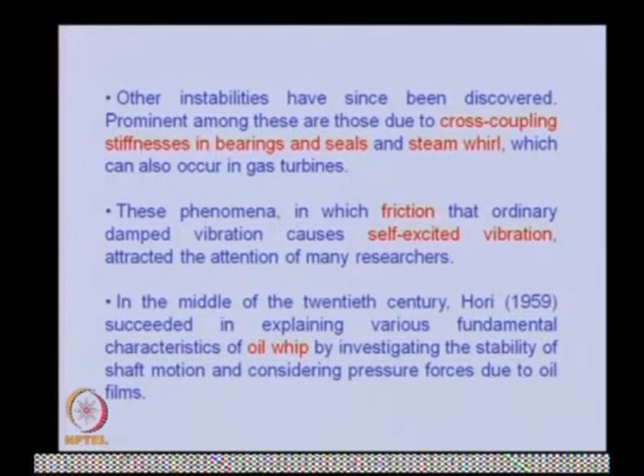In the middle of the 20th century, Hori in 1959 succeeded in explaining various fundamental characteristics of oil whip by investigating the stability of shaft motion and considering pressure forces due to oil films.

The mechanism of vibrations due to steam whirl in turbines was explained by Thomas in 1958, and that in compressors was explained by Alford in 1965.

The vibration of hollow rotors containing fluid is a relatively new phenomenon of flow induced vibration. Instability due to liquids partially filling the interior cavity of rotors was demonstrated by Kollmann in 1962, and in 1967 Ehrich reported that fluid trapped in an engine shaft induced asynchronous vibration and also changed the shape of resonance curves.

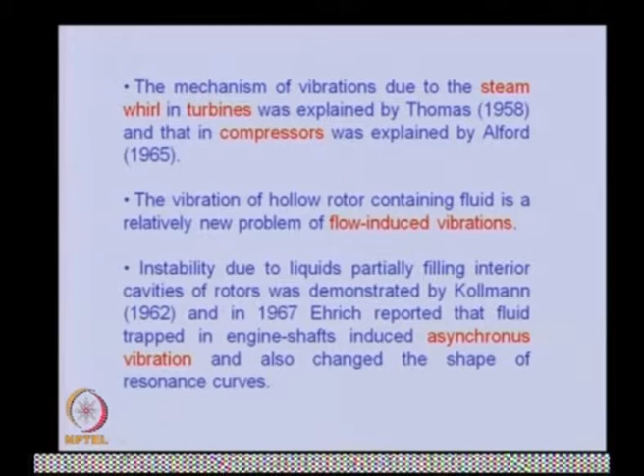Kuipers in 1964 and Wolf in 1968 independently succeeded in explaining the appearance of an unstable speed range in the post-critical region of a rotor system containing inviscid fluid.

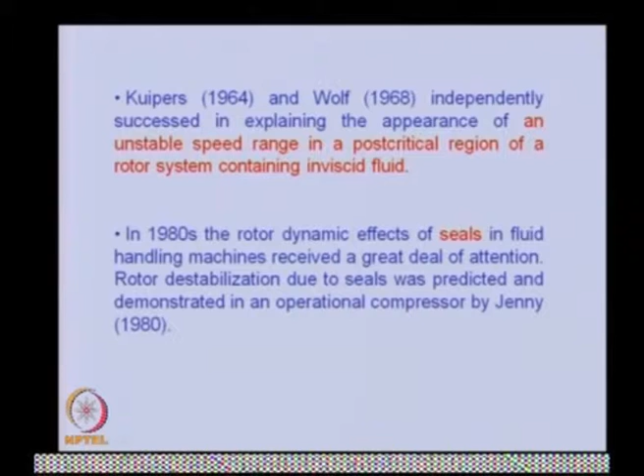In the 1980s, the rotor dynamics effects of seals in fluid handling machines received a great deal of attention. Rotor destabilization due to seals was predicted and demonstrated in an operational compressor by Jenny in 1980.

As rotors became lighter and rotational speeds higher, the occurrence of nonlinear resonances such as subharmonics of half x, one-third x, etc., became a serious problem.

Yamamoto in 1955 and 1957 studied various kinds of nonlinear resonances after he reported on subharmonic resonance due to ball bearings in 1955. He also investigated combination resonances.

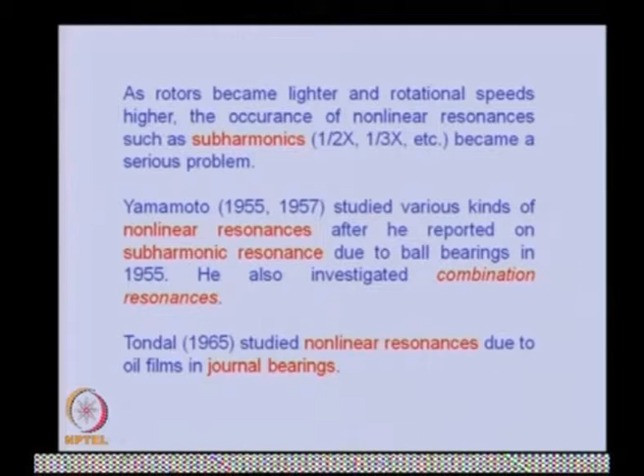Tondl in 1965 studied nonlinear resonances due to oil films in journal bearings. Ehrich in 1966 reported subharmonic resonances observed in an aircraft gas turbine due to strong nonlinearity produced by the radial clearance of squeeze film dampers.

These squeeze film dampers are identical to journal bearings. The only thing is that in the squeeze film damper, the stiffness property which a general bearing gives to the rotor is not there—only the damping it produces to the rotor.

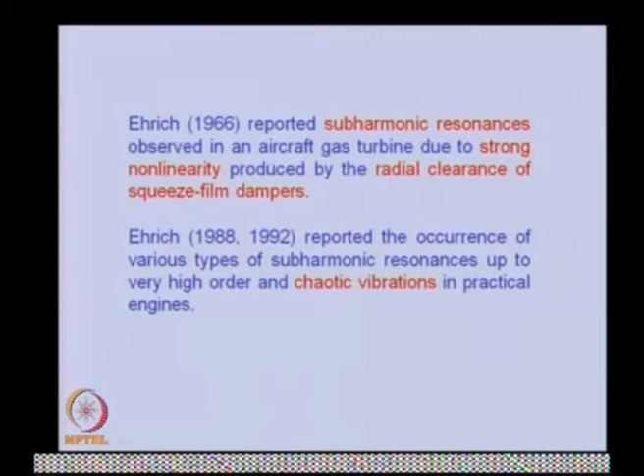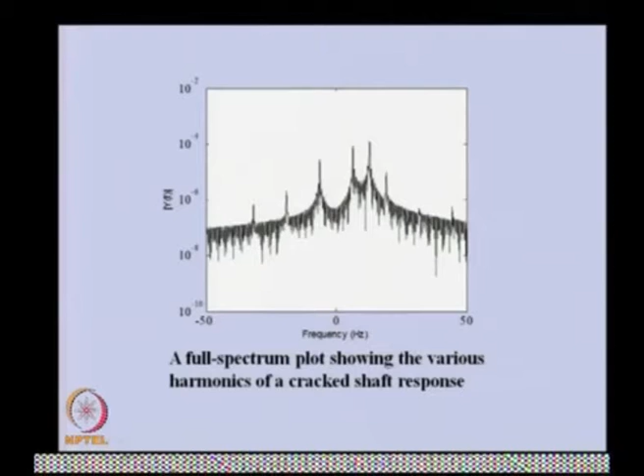The non-stationary phenomena during passage through critical speeds have been studied since Lewis in 1932 reported his investigation on the Jeffcott rotor.

Non-stationary phenomena that occur are of two types: one in a process with constant acceleration, and another with variable acceleration, in which we have limited driving torque. The theoretical analysis of such transitional problems is far more difficult than stationary oscillations. Many researchers have adopted numerical integration.

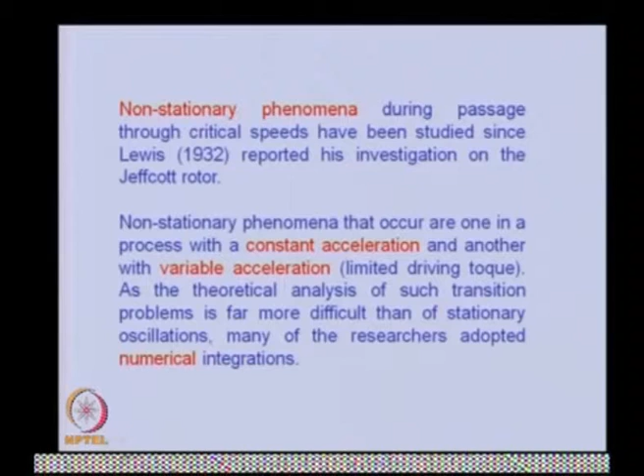In transient rotor analysis, you must have observed that to avoid the critical speeds, the rotors are generally given very high acceleration so that they can cross the critical speed very quickly and go into the supercritical region.

During acceleration, a problem may arise depending on the driving motor's power. If the drive has sufficient power, there will not be any problem achieving whatever acceleration we want. But if the drive has less power, the required acceleration will not be achieved, and you will have the problem of variable acceleration taking place.

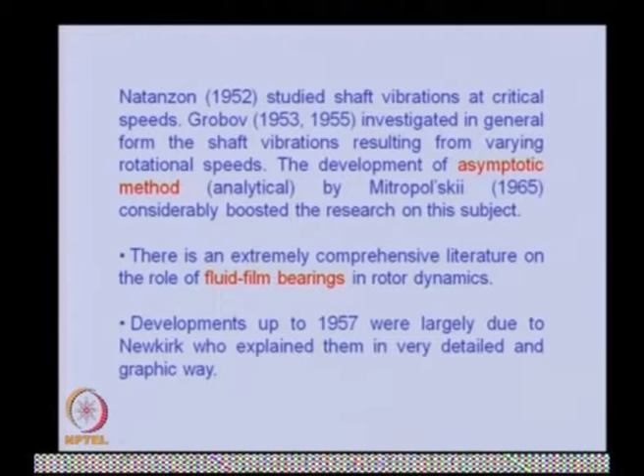There is extremely comprehensive literature on the role of fluid film bearings in rotor dynamics. Developments up to 1957 were largely due to Newkirk, who explained them in a very detailed and graphical way. Then beginning in the early 1960s, most attention focused on hydrodynamic bearings.

This was largely stimulated by Lund and Sternlicht, and Lund's work in 1962 and 64. Gunter's work in 1966 related to rotor dynamic stability problems, combined with Ruhl and Booker's 1972 and Lund's 1974 methods for calculating damped critical speed, stimulated a great deal of interest in rotor bearing stability problems. Lund in 1987 gave an overview of fluid film bearings.

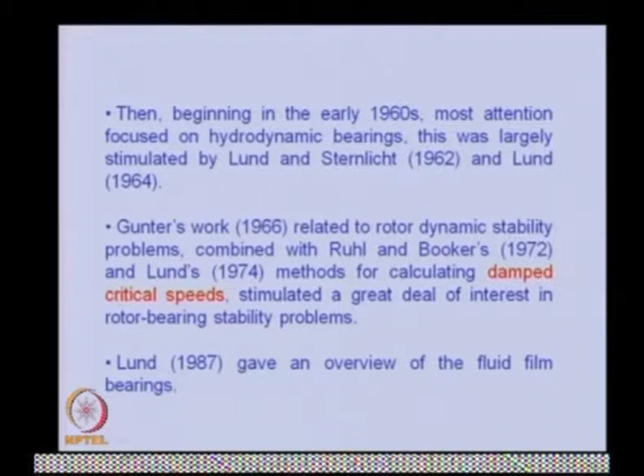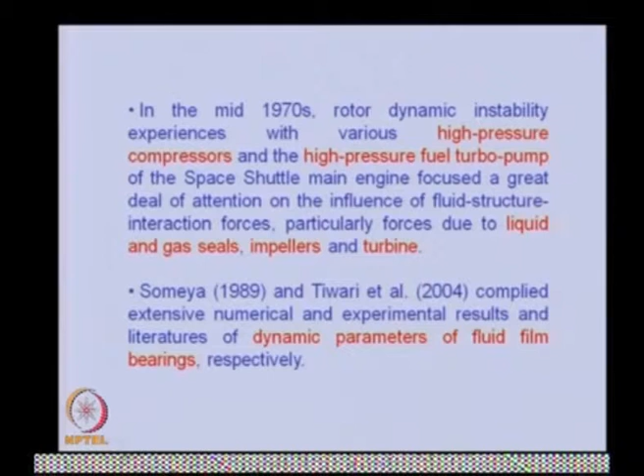In the mid-1970s, rotor dynamic instability experiences with various high pressure compressors and high pressure fuel turbopumps of the space shuttle main engine focused a great deal of attention on the influence of fluid structure interaction forces, particularly forces due to liquid and gas seals, impellers and turbines. Someya in 1989 and Tiwari in 2004 compiled extensive numerical and experimental results and literature on dynamic parameters of fluid film bearings respectively.

Shaft seals have similar effect as fluid film bearings. They influence the critical speeds, can provide damping, or on the other hand cause instability. Some of the first investigations were carried out in 1965 by Lomakin. Since then, shaft seals have acquired a significant role in their effect on rotor dynamics, as the extensive literature shows, in Childs' book in 1993 and a review paper by Tiwari in 2005.

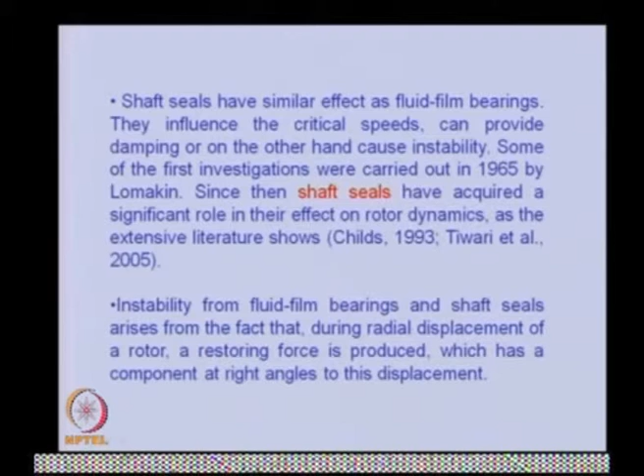Instability from fluid film bearings and shaft seals arises from the fact that during radial displacement of a rotor, a restoring force is produced which has a component at right angle to the displacement. Such a mechanism is possible for a rotor with blades as a result of variable leakage around the blade tips. The phenomena of instability was described in detail by Newkirk in 1924, whose interest was in turbomachinery.

At first, it was thought that the cause was internal friction due to shrink fits of the shaft, and the theory was developed to explain this also, together with experimental verification by Newkirk in 1924 and Kimball in 1924 and 1925.

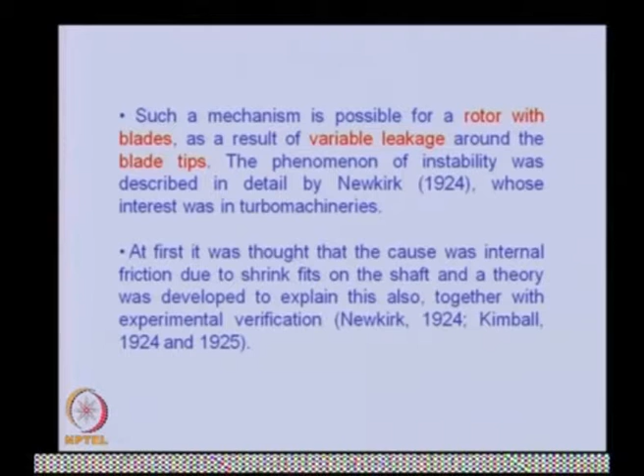Till now we have seen various literature reviews related to rotor dynamics phenomena and how people have attempted those phenomena. Now let us try to summarize whatever we have studied in a tabular form. This is a summary of various rotor dynamics phenomena and their details.

Like whirling, that is related with unbalance, was first. This particular term was used by Rankine in 1869, and this was theoretical work which described the general motion of the rotor system.

Self-centering of rotor, this concept was introduced by De Laval in 1883. This is a theoretical and experimental work which gives the unbalanced response of rotor.

Then synchronous whirling was introduced by Föppl in 1895, also a theoretical unbalanced response. Critical speed concept was introduced by Dunkerley in 1895; this is a resonance phenomenon. Second critical speed was observed by Kerr in 1916 in his experimental setup.

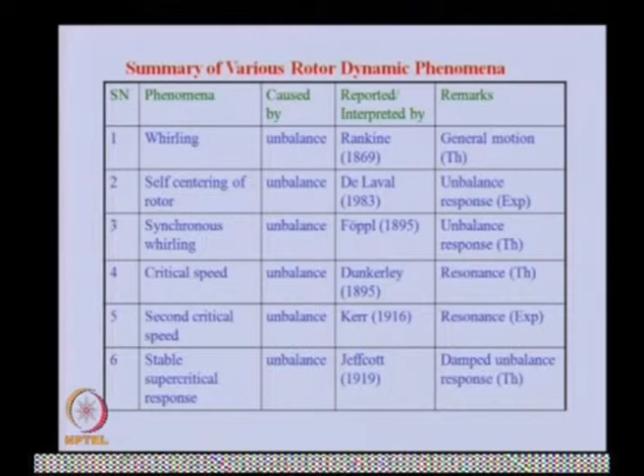Then secondary resonance due to gravity was explained by Stodola in 1924. Instability due to shaft asymmetry by Prandtl in 1918. Gyroscopic effect, that is rotor wobbling, was described in Stodola's book in 1924.

Threshold speed, spin speed for instability, that is due to internal damping, was described by Newkirk, Kimball and others. Threshold speed for instability due to dissymmetry of bearing stiffness was described by Smith in 1933.

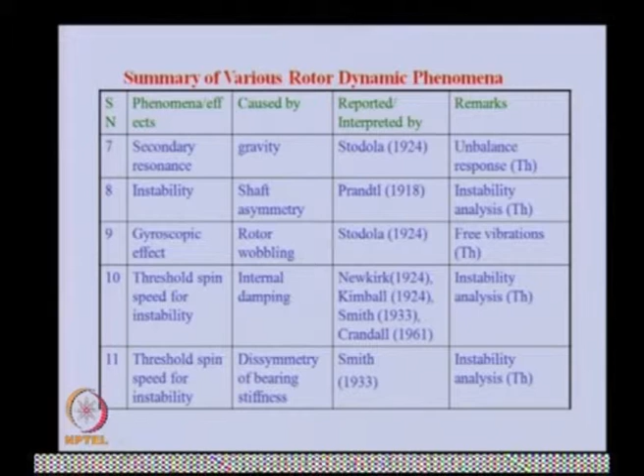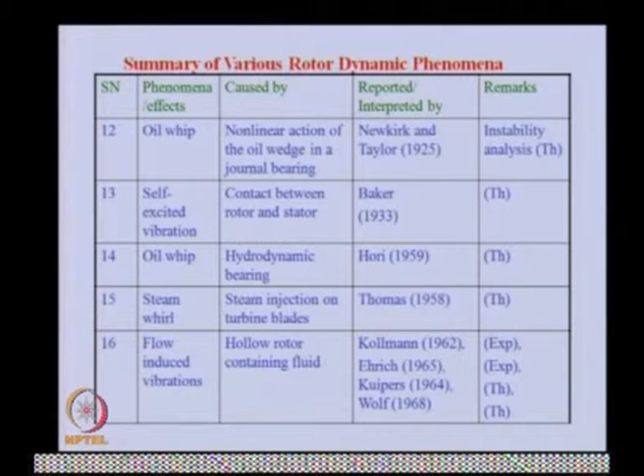Flow induced vibration in hollow rotor containing fluid was described by Kollmann and others, both theoretical and experimental works. Instability due to seals was reported by Jenny in 1980.

Subharmonics and combination resonances due to nonlinearity in the ball bearing were reported by Yamamoto in 1955 and 57. Nonlinear resonance due to oil film in journal bearings was described in great detail by Tondl in 1965.

Subharmonic resonances due to squeeze film damper were reported by Ehrich in 1966. Non-stationary response due to constant and variable acceleration of rotor speed was described by Lewis in 1932.

Shaft vibrations at critical speed, that is varying spin speed, was dealt with by Natanzon in 1952.

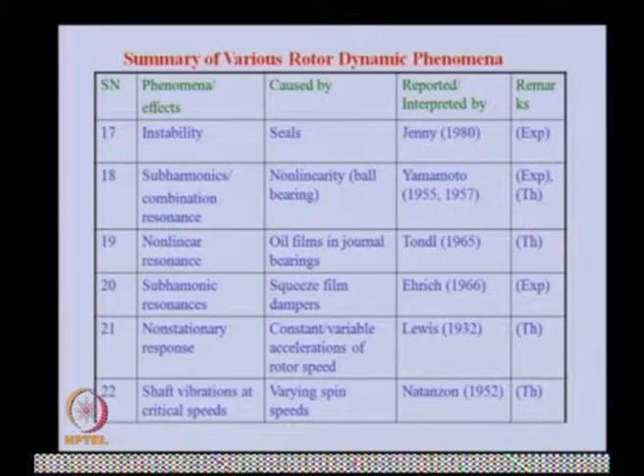Then shaft general motion, that is for varying spin speed, was described by Grobov in 1953 and 55; this was theoretical work. The damped critical speed of hydrodynamic bearing was explained by Ruhl, Booker and Lund's work in 1974. They used FEM and TMM, that is finite element method and transfer matrix method respectively.

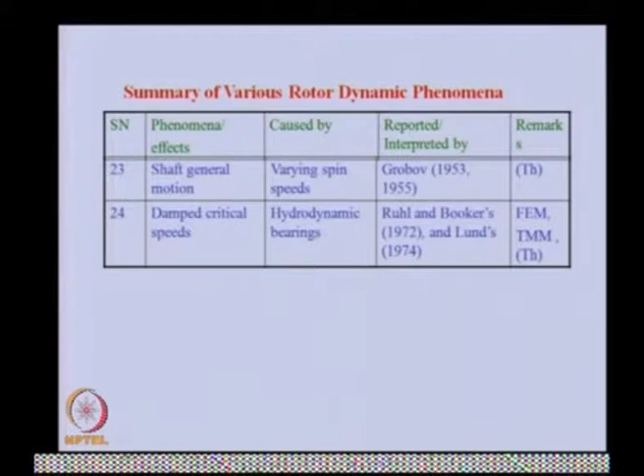Now we will begin with another phase of the presentation. This is the outline: development of rotor dynamics analysis tools, dynamic balancing of rotors and how that development took place, software for rotor dynamics analysis, condition monitoring of rotating machinery, and then conclusion and recent trends.

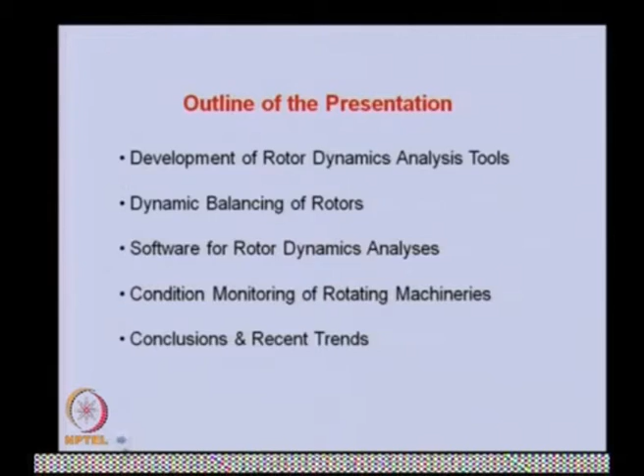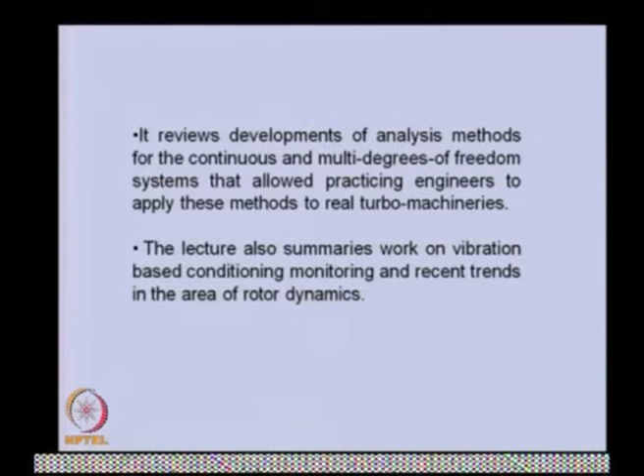So now we will review the development of analysis methods for continuous as well as multi-degree of freedom systems that allowed practicing engineers to apply these methods to real turbo machinery. The lecture also summarizes work on vibration based condition monitoring and recent trends in the area of rotor dynamics. So let us see the development of rotor dynamics analysis tools.

A remarkable amount in rotor dynamics can be explained by the dynamics of a single mass Jeffcott rotor model. We have seen that there was confusion in the history of rotor dynamics, and Jeffcott clarified those confusions. Because of this, the Jeffcott rotor model is very popular and very helpful in analyzing most simple rotor behavior.

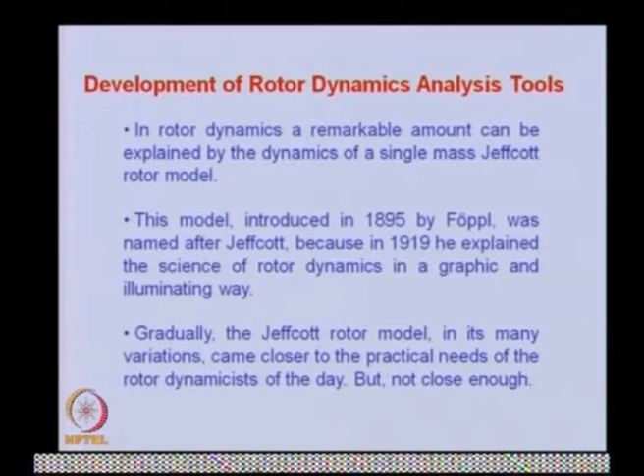This model was introduced in 1895 by Föppl and was named after Jeffcott, because in 1919 he explained the science of rotor dynamics in a graphical and illuminating way. Gradually, the Jeffcott rotor model in its many variations came closer to the practical needs of rotor dynamists of the day, but not close enough.

Vibrations of rotors with continuously distributed mass were studied. In rotors, we can model them as discrete masses or as continuously distributed properties. In continuously distributed property, both the mass and stiffness of the shaft vary along its length, but in a discrete system lumped masses are connected by massless springs. These are two different models, and as we go into the subject in more detail, we will appreciate this terminology.

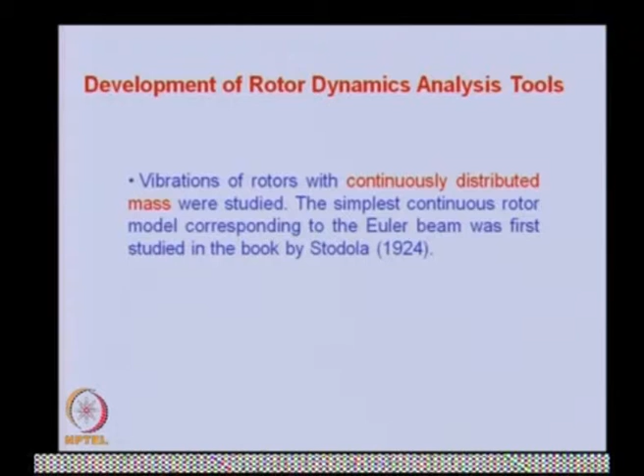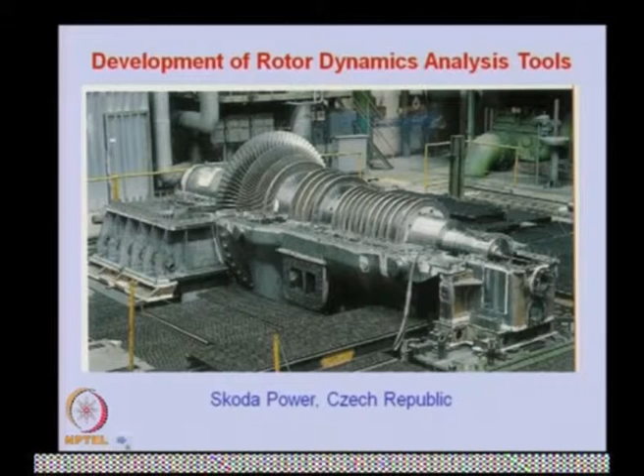The simplest continuous rotor model, corresponding to the Euler beam, was first studied in the book by Stodola in 1924. This is the typical turbine which we are able to analyze using the analysis tools available with us today.

The critical speed of shafts with distributed mass was also examined by Grammel in 1920 and 1929. In the 1950s and 1960s, Bishop and his co-workers like Parkinson and Gladwell, along with Dimentberg and Tondl, reported a series of papers and books on unbalanced response and the balancing of continuous rotors.

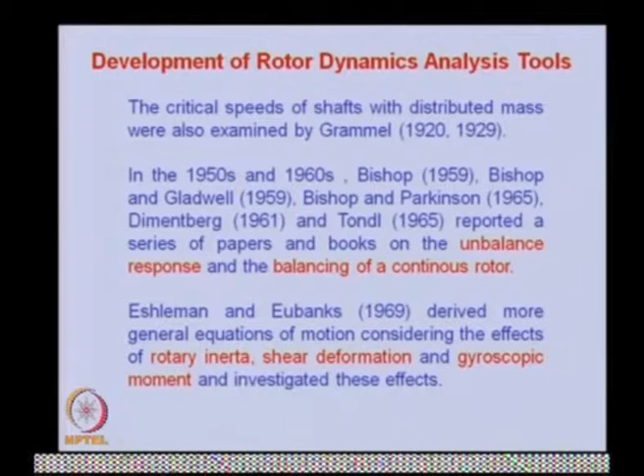Eshleman and Eubanks in 1969 derived more general equations of motion considering the effects of rotary inertia, shear deformation, and gyroscopic moment, and investigated these effects. Rotary inertia, shear deformation, and gyroscopic effect are generally called higher order effects in rotor dynamics, and we will see as we go deeper into the subject how these phenomena affect the natural frequency and critical speed of the rotor system.

Many practical rotors, especially those designed for aircraft gas turbines, were not suitable for a Jeffcott model. For one thing, the distinction between disk and shaft is blurred in a typical aircraft gas turbine. In the practical design of rotating machinery, it is necessary to accurately know the natural frequencies, mode shapes, and forced responses to unbalance in a complex shape rotor system.

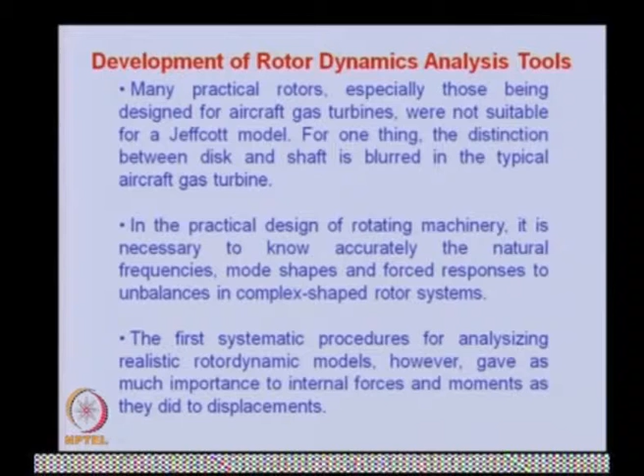The first systematic procedure for analyzing a realistic rotor dynamics model gave as much importance to internal forces and moments as to displacements. The method of Holzer in 1921 for torsional vibration was of this type, and engineers could apply this method using only a slide rule. A more general modeling technique was needed.

This was supplied by Prohl in the late 1930s and published in 1945 for critical speed evaluation of turbine shafts. It is similar to the method published around the same time by Myklestad in 1944 for the natural frequencies of aircraft wings, but was developed independently. Of course, Prohl's method was designed for a rotating structure rather than a stationary one.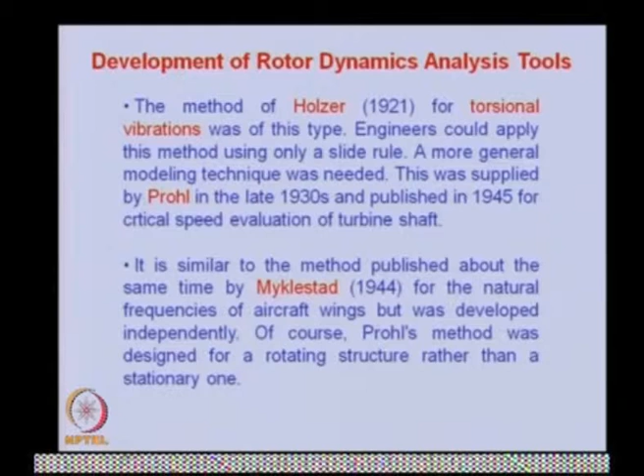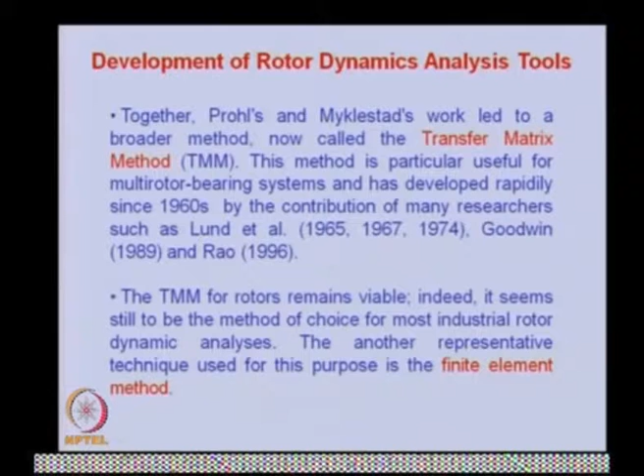Together, Prohl's and Myklestad's work led to a broader method now called the transfer matrix method, or TMM. This method is particularly useful for multi-rotor bearing systems and has developed rapidly since the 1960s through contributions from many researchers including Lund, Goodwin, Rao, and others. The TMM for rotors remains viable; indeed, it still seems to be the method of choice for most industrial rotor dynamic analysis. Another representative technique used for this purpose is the finite element method.

Although most of the concepts used in finite element analysis were described by Courant in 1943, the real development of the finite element method as an engineering tool occurred a decade later with the introduction of digital computers and the formulation of structural analysis in matrix format by various researchers, then used in various technological fields. The name finite element method first appeared in the title of a paper by Clough in 1960.

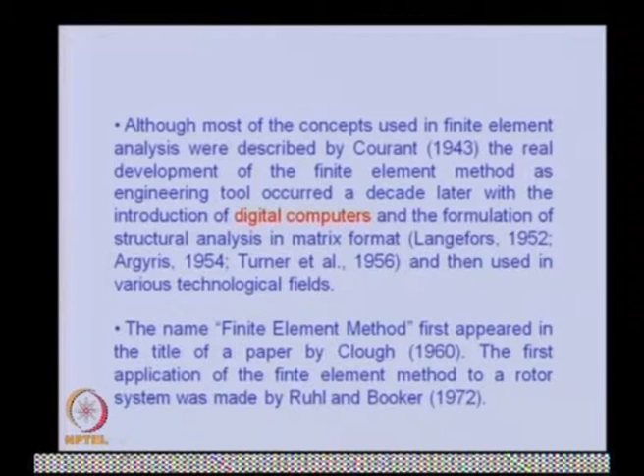The first application of the finite element method to the rotor was made by Ruhl and Booker in 1972. Then Nelson and McVaugh in 1976 generalized it by considering rotary inertia, gyroscopic moment and axial force. It was soon recognized that the large number of nodes necessary to provide accurate stress distribution created a dynamic system too large for economical calculation in a three-dimensional solid model of such rotors.

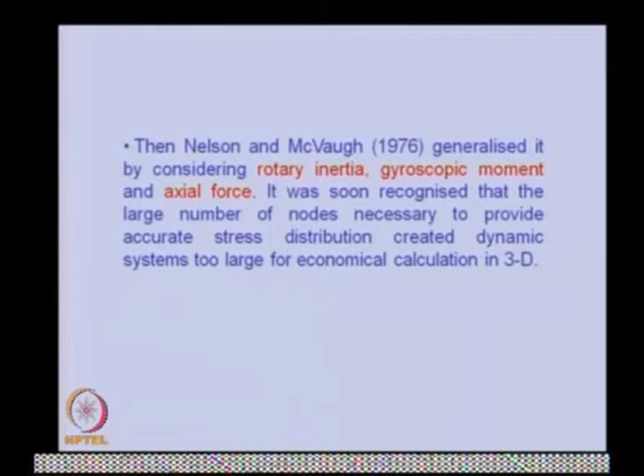Now we will see how people in industry were balancing the rotor, and how the very sophisticated method of balancing of such rotors based on vibration took place in history. The most important and fundamental procedure to reduce unfavorable vibration is to eliminate geometric imbalance in the rotor. The balancing procedure for the rigid rotor was established relatively early.

A practical balancing machine based on this technique was invented in 1907. The arrival of high speed rotating machinery made it necessary to develop a balancing technique for flexible rotors.

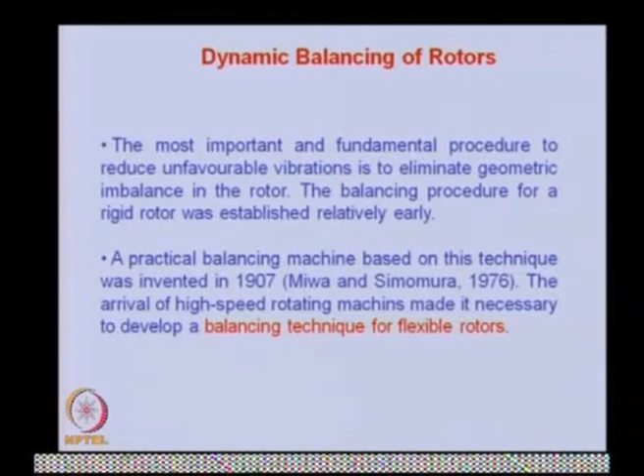Two representative theories were proposed. One was the modal balancing method proposed in the 1950s by Federn, Bishop and Gladwell. The other is the influence coefficient method proposed in the late 1930s by Rathbone and later by Thearle in 1932, developed mainly in the United States along with the progress of computers and instruments for vibration measurement.

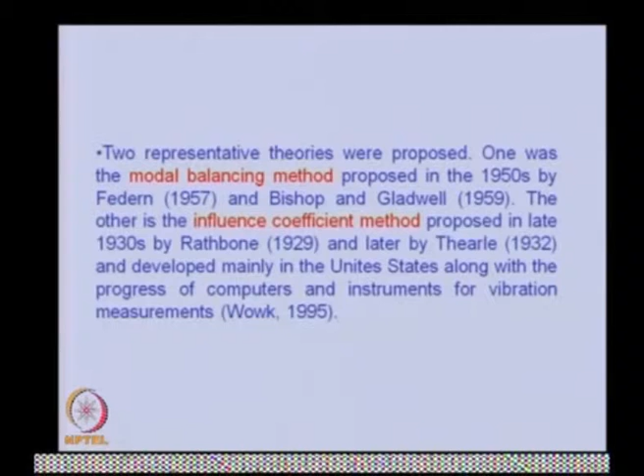This is the basic concept of rotor unbalance in a short rigid rotor. You can see the first is the perfectly balanced rotor. The geometrical center and center of gravity are in line with the center axis of rotation of the shaft, as shown in the first figure.

In the second figure, there is a static unbalance, meaning there is a radial offset of the rotor from its center axis of rotation, causing an unbalanced force. The next case is where the short rotor got tilted by some amount, and because of this there is a couple which acts, whose magnitude is given by...

This is the angle of tilt of the rotor, omega is the spin speed, IP is the polar mass moment of inertia, and ID is the diametral mass moment of inertia.

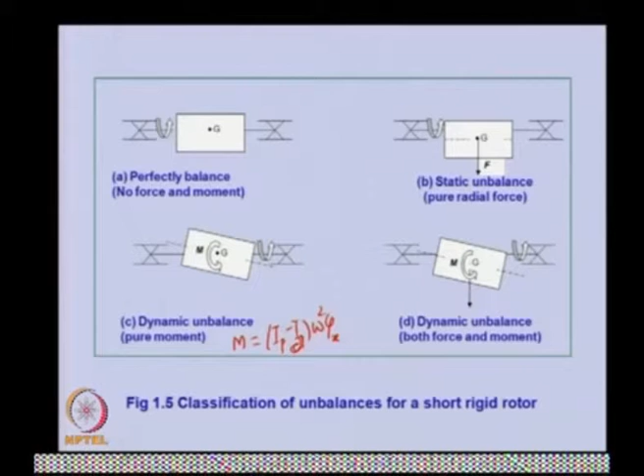The fourth case is the combination of moment and force due to not only the tilting of the rotor but also the radial shift of the rotor. So this produces both force and moment. You can see that case B requires a single plane to balance, but cases C and D would require two planes to balance.

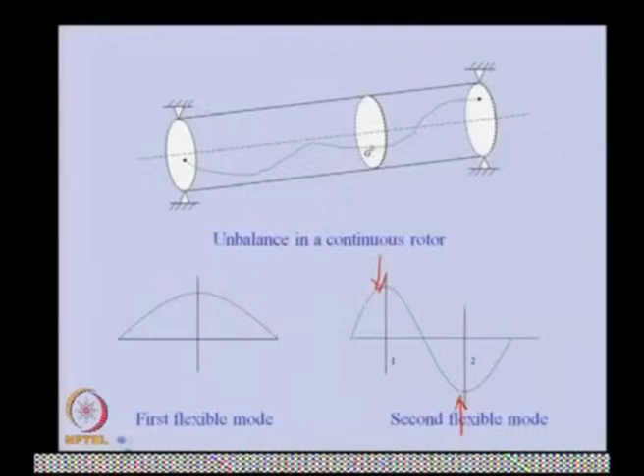Now we will see some of the tools, because as methods for analyzing rotors were developed, simultaneous development of computers was taking place. People were developing indigenous software for analyzing rotors, and these indigenous software packages gradually became some of the commercial software we see today. Let us see them in the subsequent slides.

World War II can be considered as the demarcation between the early stage of rotor dynamics and what might be called modern rotor dynamics. This was the consequence of two factors.

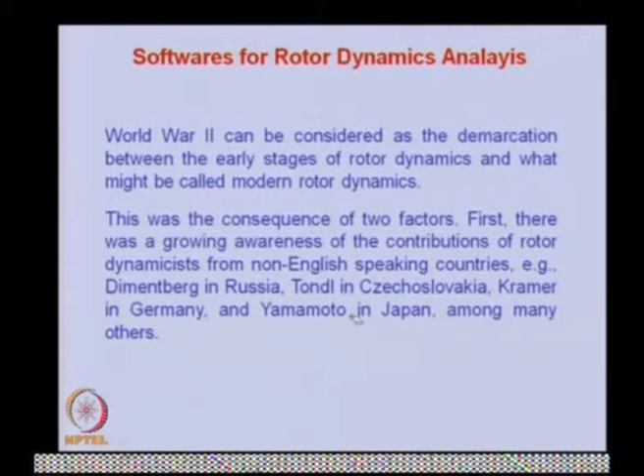First, there was a growing awareness of the contribution of rotor dynamicists from non-English speaking countries, like Dimentberg in Russia, Tondl in Czechoslovakia, Kramer in Germany, Yamamoto in Japan, among many others.

Clearly, after World War II, rotor dynamic analysis had become an international endeavor, a fact recognized by the founding of the rotor dynamics committee of the International Federation for Theory of Machines and Mechanisms, called IFToMM. Beginning in 1982, international conferences have been organized by this committee in Rome, Tokyo, Lyon, Chicago, Darmstadt, Sydney and Vienna.

Second, there was a revolution in solution capability, a transition from somewhat simplified models to almost actual geometry. In the 1960s, there was a coalescence of various numerical methods applied to structural dynamics, and the growth of digital computer capacity fostered the development of a series of general purpose computer codes in this particular field.

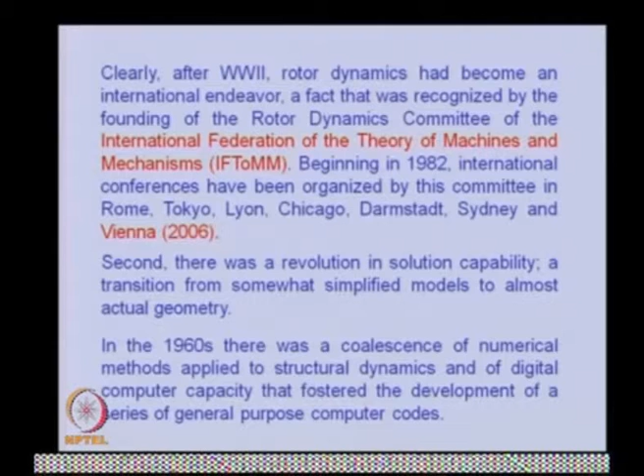The initial application of these codes to rotor dynamics was based on the transfer matrix method, but in the 1970s another underlying algorithm, the FEM, became available for the solution of prevailing beam based models.

Now, beginning in the 21st century, rotor dynamics combines FEM and solid modeling techniques to generate simulations that accommodate the coupled behavior of flexible disk, flexible shaft and flexible support structures into a single massive multidimensional model.

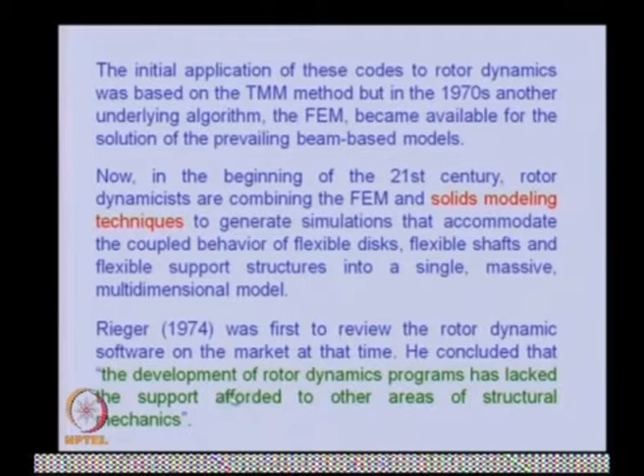Rieger in 1974 was the first to review the rotor dynamics software on the market. At that time, he concluded that the development of rotor dynamics programs has lacked the support afforded to other areas of structural mechanics.

Crandall in 1992 gave an overview of rotor dynamics computer codes like ANSYS and other software available in the market. The classical Jeffcott rotor with 4 degrees of freedom was used to illustrate free, forced and self-excited vibration problems for rotor dynamic systems.

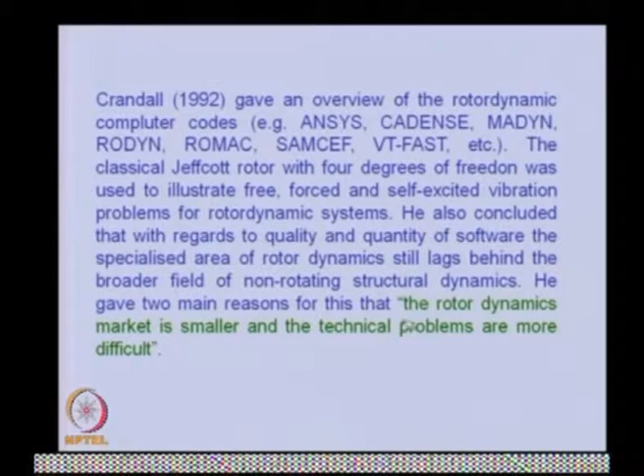He also concluded that with regard to quality and quantity of software, the specialized area of rotor dynamics still lags behind the broader field of non-rotating structural dynamics. He gave two main reasons for this: that the rotor dynamics market is small and the technical problems are more difficult.

Now, I will review a very important aspect of such rotating machinery, that is condition monitoring. Because whatever the theory and development of analysis, these rotors or rotating machineries are well developed and various rotating machineries are operating in the industry, but during operation frequent failures are occurring, and because of that these condition monitoring techniques are getting more popular, so that both money and manpower can be saved.

So, in the 1960s, cracks were found in rotors of some steam turbines. To prevent serious accidents and to develop a vibration diagnostics system for detecting cracks, research on vibrations of cracked shafts began.

In the 1970s, Gasch in 1976, Henry and Okah-Avae investigated vibrations, giving consideration to the nonlinearity in stiffness due to open-close mechanisms. They showed that an unstable region appeared or disappeared at the critical speed depending upon the direction of the unbalance.

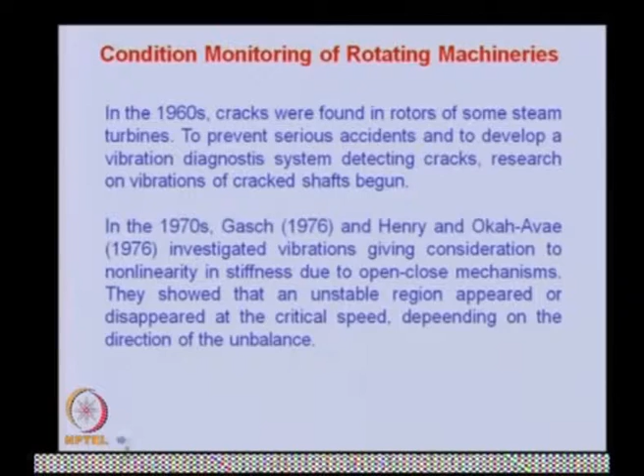Another area in which a lot of development took place is the assessment of turbomachinery condition monitoring and failure prognosis techniques.

In this particular condition monitoring, different levels of condition monitoring are possible. First is the detection of the faults. Second is the diagnosis, that is, people try to find out what is the severity of the fault. Then the next level, after finding the severity, is whether we are able to quantify what is the life of the machine with that fault, that is, whether we are able to find out the remaining life of the machine, so that we can operate the machine for a few months or a few hours, and plan the maintenance accordingly, or address urgency.

There are different levels of condition monitoring which we are able to do. First is the detection of the fault, in which we detect the fault, and the second stage is localizing that fault, where we try to find out where the fault is in the machinery. The third stage is where we try to quantify the fault, that is, how much severity it has, and the fourth stage is where we are able to find out how much more time we can operate the machine with that particular fault. So, that is the useful remaining life of the machine we can predict, so that we can plan the maintenance accordingly.

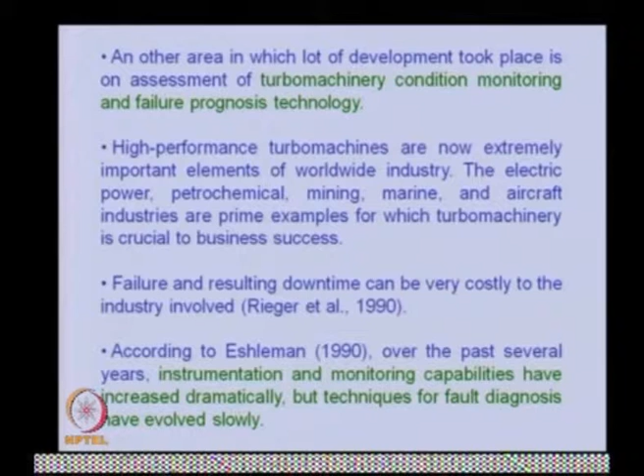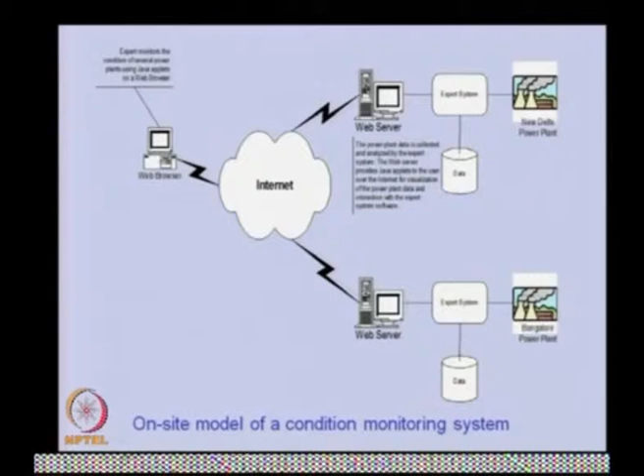So, the tools are still more advanced than the techniques, and there are three technical areas that must be addressed for effective fault diagnosis using vibrations: condition and fault mechanism, modification of signal transmission path, and signal analysis. Edward in 1998 provided a broad review of the state of the art in fault diagnosis techniques with particular regard to rotating machinery.

A detailed review of the subject of fault diagnosis in rotating machinery was then presented. Special treatment was given to the area of mass unbalance, bowed shaft, and cracked shaft, these being amongst the most common rotating rotor dynamics faults.

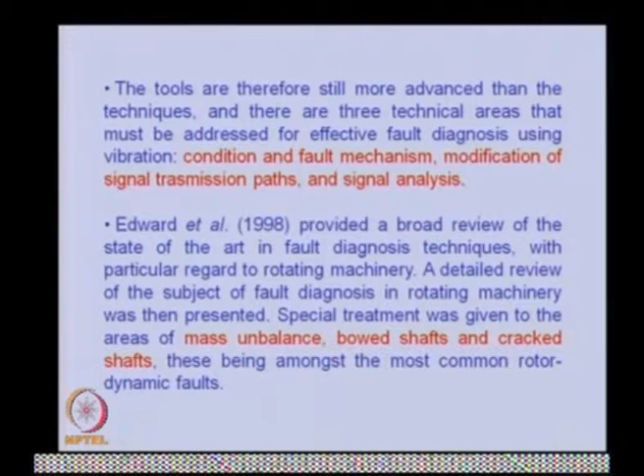Vibration response measurement yields a great deal of information concerning any fault within rotating machinery, and many methods utilizing this technique are reviewed in this paper. Some other reviews provided a broad overview of development and progress in condition monitoring, diagnostics, and failure prognosis techniques applicable to high performance turbo machinery.

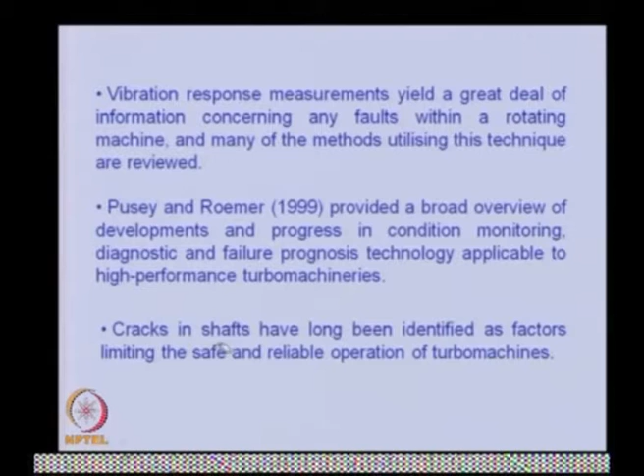Cracks in shafts have long been identified as a factor limiting the safe and reliable operation of turbo machinery. They can sometimes result in catastrophic failure of equipment, rotor bursts, and more often in costly process upsets, repairs, and premature scrapping and replacement of equipment.

In the past three decades, much research and many resources have gone into developing various online and offline diagnostic techniques to effectively detect cracks before they cause serious damage. Sabnavis et al. in 2004 reviewed literature on cracked shaft detection and diagnosis published after 1990.

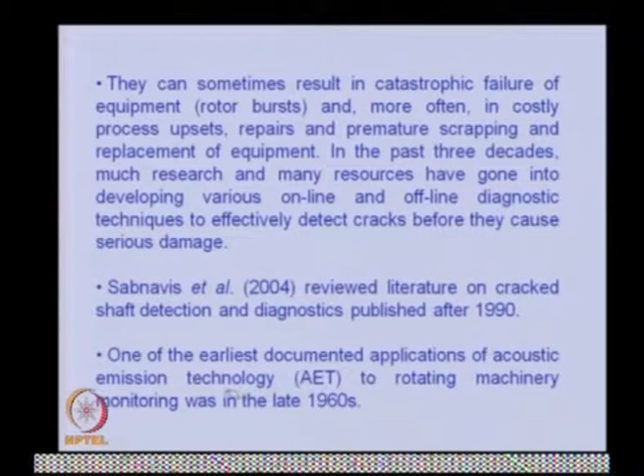One of the earliest documented applications of acoustic emission technology to rotating machinery monitoring was in the late 1960s. Since then, there has been an explosion in research and application based studies covering bearings, pumps, gearboxes, engines, and rotating structures.

Some other researchers, like Mba and Rao in 2006, presented a comprehensive and critical review of the application of acoustic emission technology to condition monitoring and diagnosis of rotating machinery.

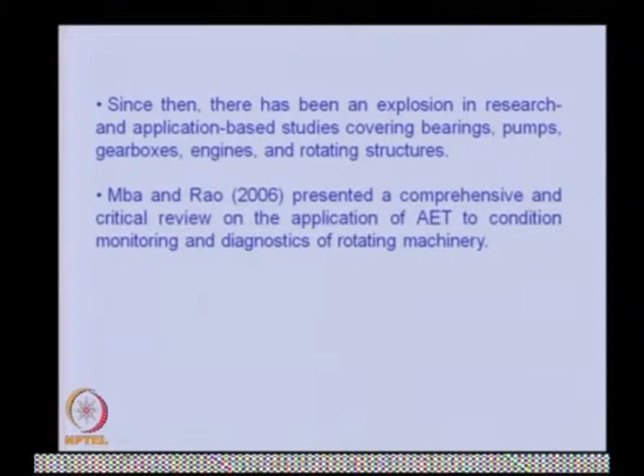So now we have already reviewed various analysis tools and condition monitoring tools. Now let us see the recent trend in this particular topic of rotor dynamics, so that new researchers can see what the openings are in the research in the rotor dynamics field.

So the latest topic in rotor dynamics is the study of magnetic bearings. It is a mechatronics product which supports a rotor without contacting it, and it gives an active damping effect. This study has received considerable attention since the work reported in 1975. We are now a long way from the approach of Jeffcott and Prohl, a journey that deserves its own history sometimes.

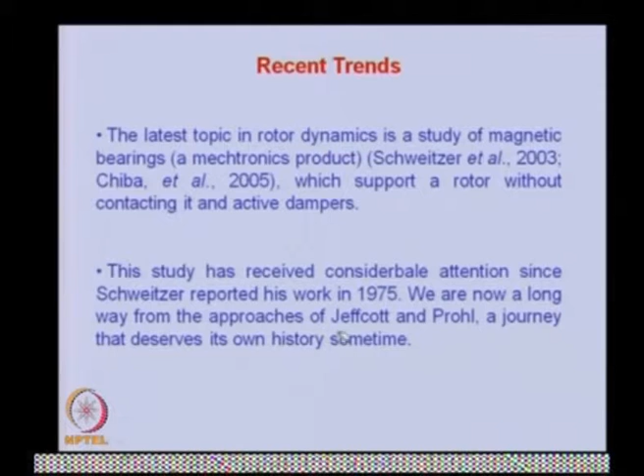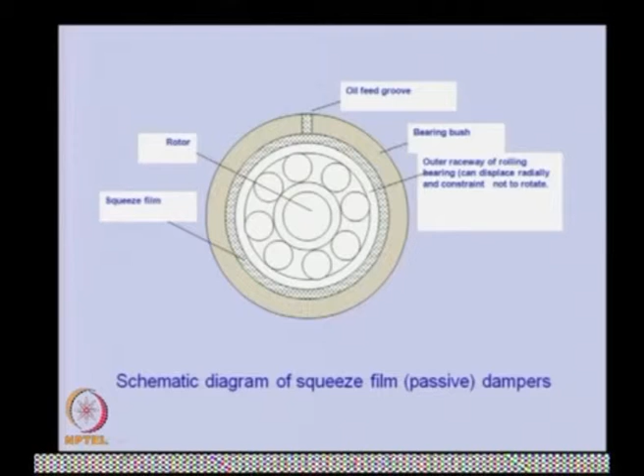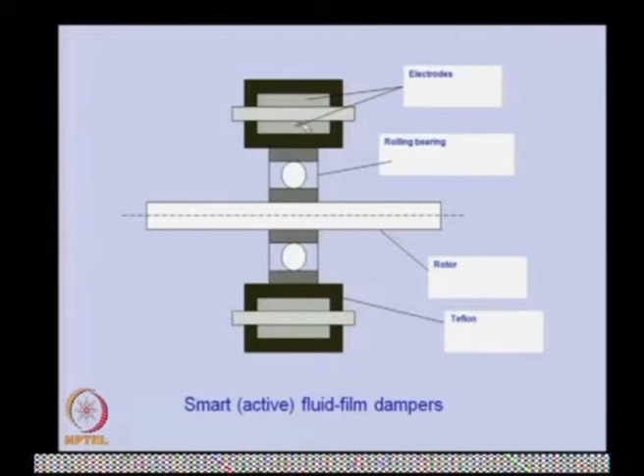Now let us see some active fluid film dampers, in which you can see this is a rotor, this is a bearing, and here an active device is present, similar to the squeeze film damper, but the property of the fluid gets changed because of these electrodes. Those fluids are special kinds of fluids, either magneto-rheological fluid or electro-rheological fluid, and if we change the magnetic flux or current through these electrodes, the property of the fluid changes, like stiffness and damping, giving different damping and stiffness to the support system, and this can be changed actively.

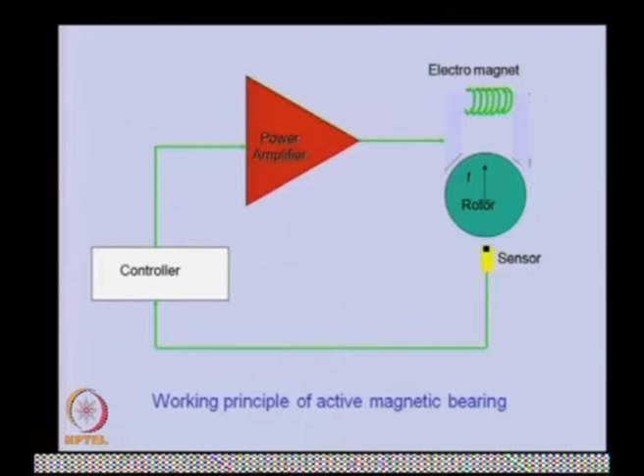This is one of the active research areas. We know the advantage of these bearings: because the rotor is floating on the air, there is no lubrication required, friction is less, there is no mechanical contact, and generally only high speed whose limit is the strength of the material. There is no problem as such with speed being constrained by bearing friction. Only the rotor strength should be enough to have that much speed.

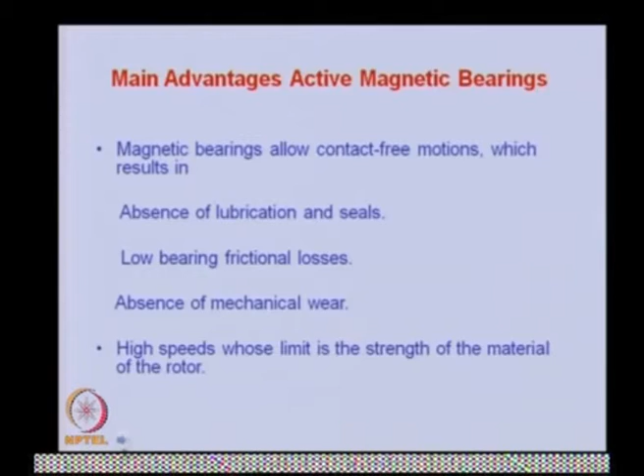With this magnetic bearing, not only can we suppress the resonance, we can also have online balancing, because we can change the stiffness and damping property online. These are some other advantages we can have, like we can eliminate the instability in the system also.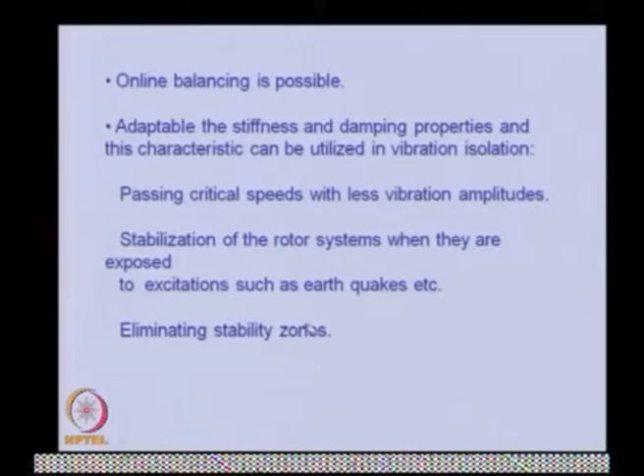In the last two lectures we have seen the introduction to rotor dynamics. We have seen the history of rotor dynamics, even the state of the art in rotor dynamics. To brief these lectures, especially what is the recent trend, that is very important.

As I have already mentioned, one of the areas where we should focus is on bearings, because bearing models are still not capable of predicting the actual behavior of bearings used in industry, and in most cases the bearing gives instability. Their properties are hard to find using available theoretical models, or if theoretical models are there, the difficulty is getting the proper properties which these models require. So more research is required toward the bearings.

Also, the foundation of such rotors is very important; it also plays a role in the dynamics of the rotor. Apart from this, in bearings we have seen some kind of active bearings come up. They still require more research so that they can be more reliable.

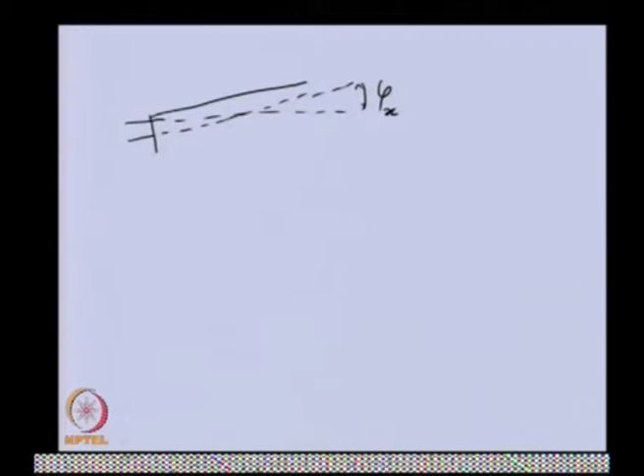Now, in the long rotor case, I will show another case. Let us say this is the original axis of the bearing, and the shaft axis is inclined by some angle, let us say this angle is phi x. So the rotor is basically inclined like this — I have exaggerated the inclination just to show it clearly.

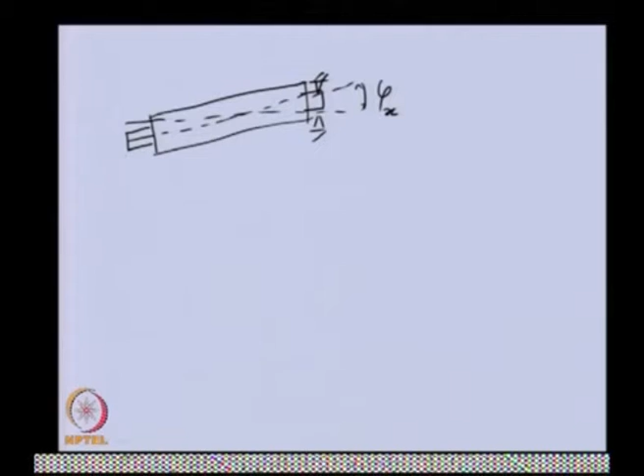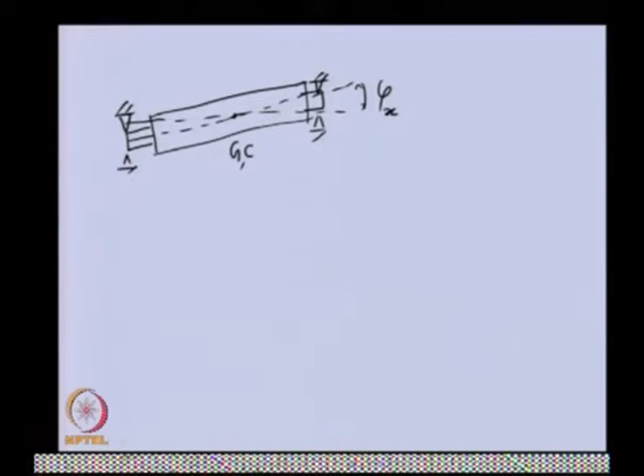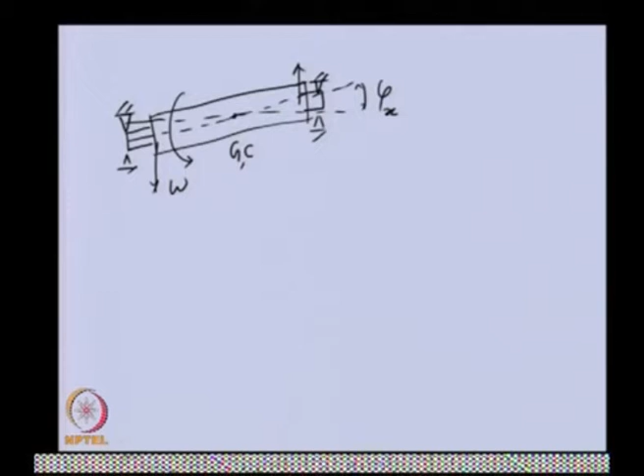Here, the center of gravity is on the bearing axis, so both the geometrical center and the center of gravity are at the same place. So when this rotor is rotating at some RPM, there will not be any centrifugal force, because the center of rotation and center of gravity are at the same location, but there will be a moment because of this inclination, and that moment will be (Ip minus Id) omega squared times the angle of the rotor axis with respect to the bearing axis.

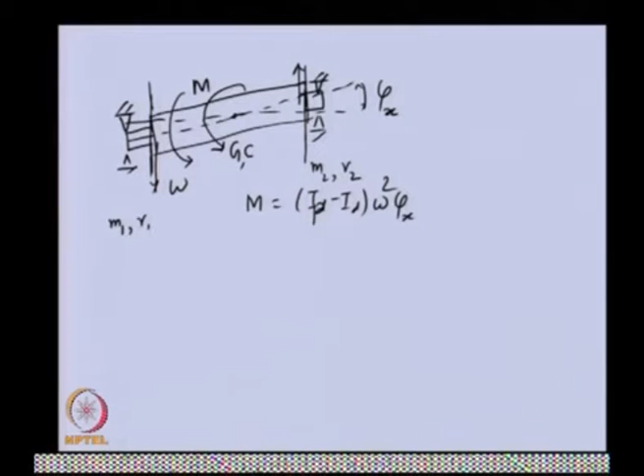For this particular case, because a moment is now acting on the rotor, we require two planes to balance it. We can choose one plane at this end and one at the other end, and put some mass at a particular radius, and another mass at some other radius, to balance this moment. Once we have this moment value, these can be obtained using moment balance in this particular plane.

Another case is when, let us say, this is the bearing axis and the rotor axis is not only inclined but also has some radial offset. In this case, the rotor will have a force which is m e omega squared, and there will be a moment which will be the same as the previous one because of this tilt of the rotor.

In this case, we have both moment and force, and when we try to balance this rotor at two locations, we will have two different masses at different radial positions, which can be used to balance both the force and the moment. So for both the previous case and this case, we require only two planes to balance the rotor. This kind of balancing is called dynamic balancing, and because the rotor is rigid, we require only two planes to balance it.

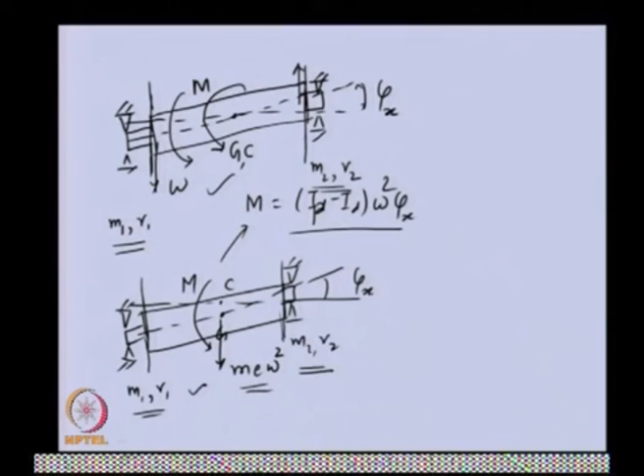In the subsequent lecture, we will try to derive these relations when we cover the dynamic balancing of the rotor.